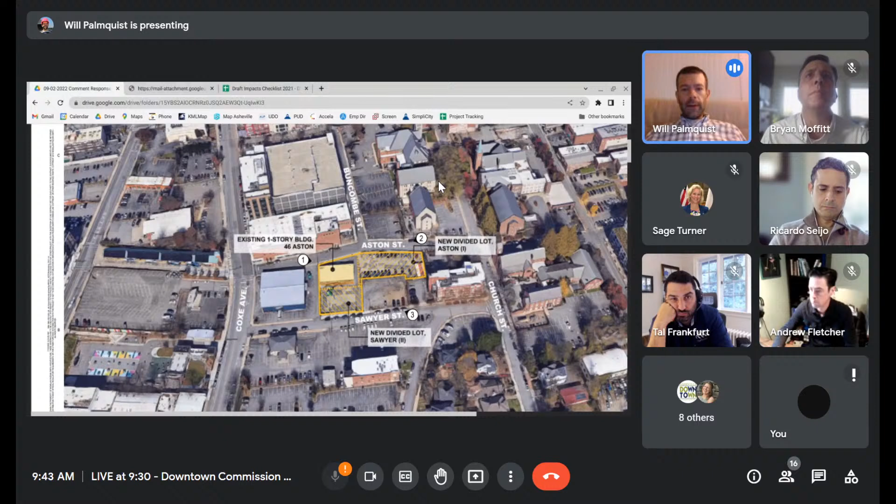The site, outlined here in hatching, is an interesting shape that sits higher on Aston Street with retaining walls on the south side. It's currently 2 parking lots plus an existing 1-story building proposed to be renovated. Surrounding uses include Aston condominiums to the east, a county building to the north, and a church on Aston Street.

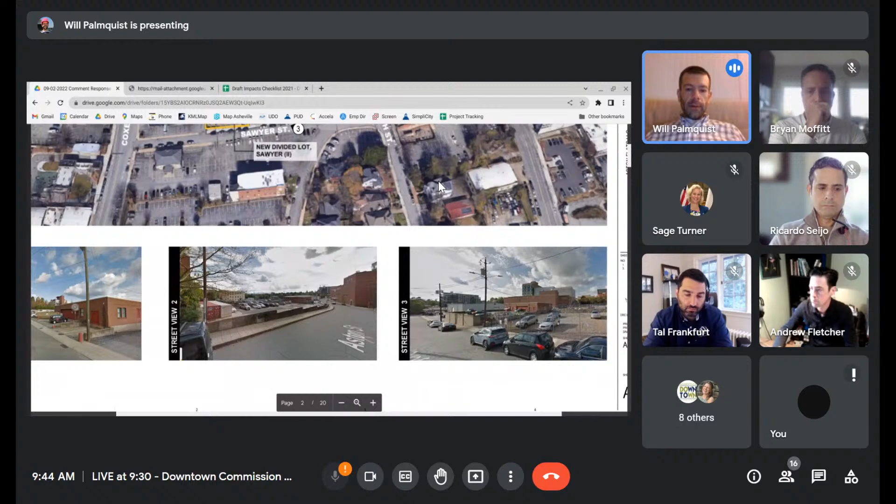Here are some views giving a sense of the urban design going on there, which is a bit of a transition at the edge of downtown. Hopefully this project can help fold this area a little more back into the downtown fabric.

Let's go to the site plan. What's being proposed is 2 new 7-story buildings, outlined here in orange, to the northeast and southwest of the site. The buildings are pretty much the same height. Building A, the Aston Street building, is bigger overall with 159 microhousing units of the 231 being proposed, and Building B on Sawyer Street has 72 units.

You can see the existing building here that'll be renovated and used for some kind of commercial space, with a plaza seating area located to the north on Aston Street.

Just to back up a little, what's being proposed between these buildings is 231 micro housing units, similar to the Hilliard micro flats project, with efficiency units that have a living area and bathroom but not a kitchen. Each floor has a communal kitchen and living lounge space for congregating, which helps keep rents lower. There's not necessarily guaranteed affordability at certain income ranges, but it's a market-driven approach to providing more attainable housing at better price points than typical studio or one-bedroom apartments with kitchens and bathrooms.

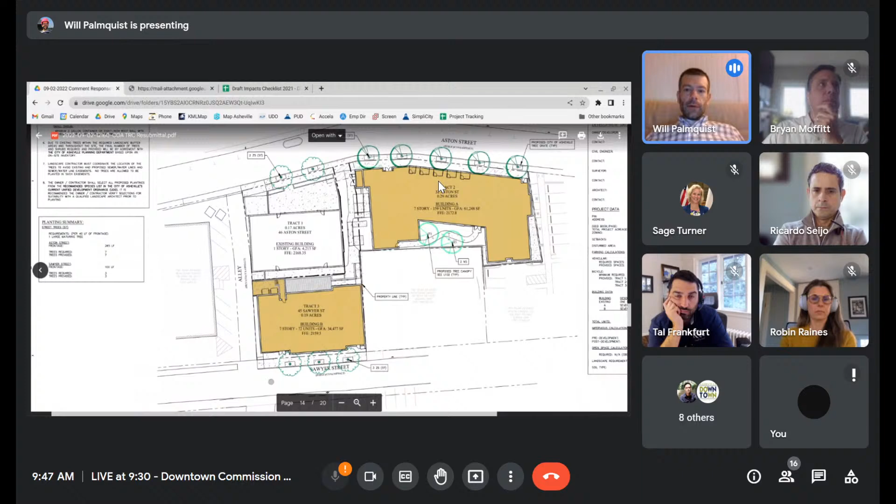Going down to the elevations - here's the landscaping plan. It's pretty minimal in the CBD as far as required landscaping, mostly consisting of street trees along Aston Street with the rebuilt sidewalk and tree grates, and along Sawyer Street as well. For tree canopy preservation, they have a couple trees in the courtyard area behind Building A, covering about half the requirement, with fee in lieu proposed for the other half.

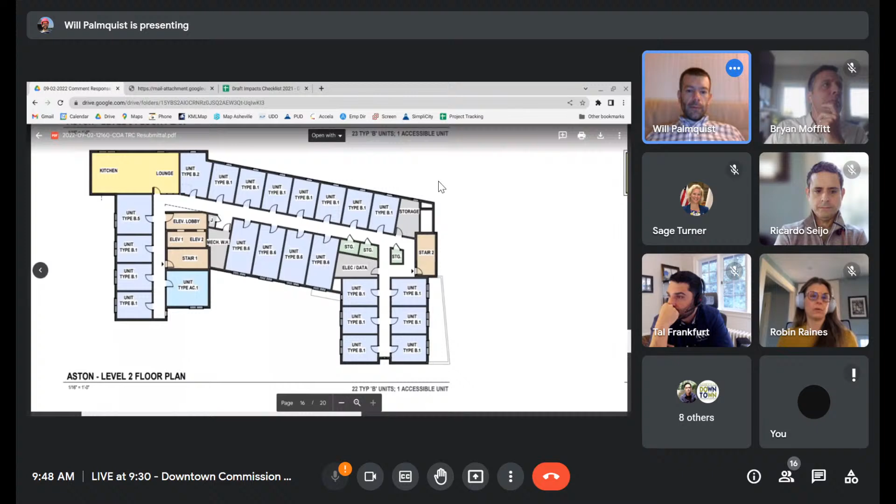Here are the floor plans. I'll zoom in on one of them - they're fairly typical for each floor. You get a sense of how the units are arranged, along with the kitchen and lounge space on each floor, as well as storage space for residents. That's pretty typical for each floor and relatively consistent between the buildings.

This is the Aston Street facing building, which is a little more linear. Here's the facade facing Aston Street.

I should note an interesting aspect of the project: the CBD zoning district does not require any off-street parking, and none is being proposed. Although not required, they are proposing bicycle parking and other amenities to bolster that as a transportation option. We don't get many projects downtown without parking, so that's an interesting and frankly exciting aspect of the project.

There's a materials board, so I'm not going to talk about materials right now, but first get a sense of the layout of the building, how it works in the hillside, the different bays and massing - a lower podium, for lack of a better word, with a different arrangement and staggered windows above.

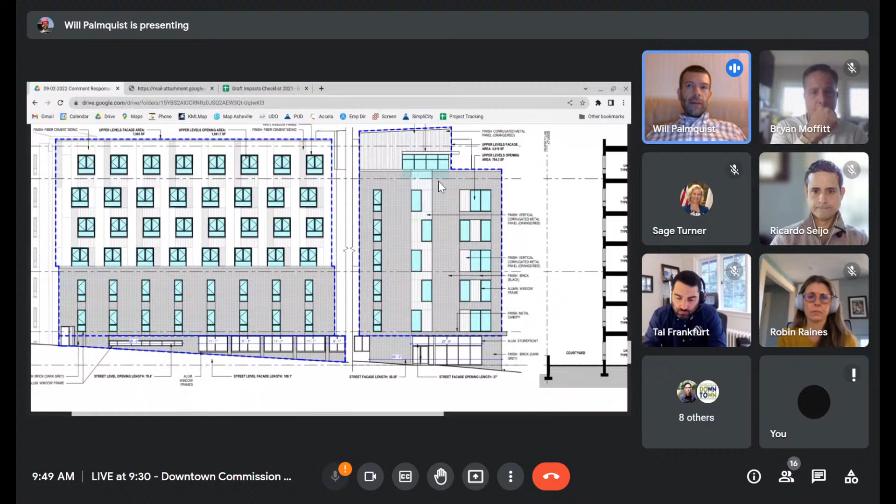And then as you turn the corner, what's on the right here is the west elevation, if I'm not mistaken, shown here.

Right, so that's the west elevation, south elevation here, demonstrating that they do meet the opening requirements for windows and other openings for the CBD form code requirements.

The building's not on a primary pedestrian street, so it doesn't have the enhanced requirements that some projects have. It is split between the tallest height zone and intermediate height zones of the CBD, but it meets the requirements of both of those, so it is obviously in compliance with CBD zoning to stay as level 2, not have to get a conditional zoning or a variance of some kind.

So this is the floor plan for the Sawyer Street facing building. You can see it's a much more compact building, with stairs and elevator in the center of the floor plan, and the units, kitchen, and lounge arranged around that central element.

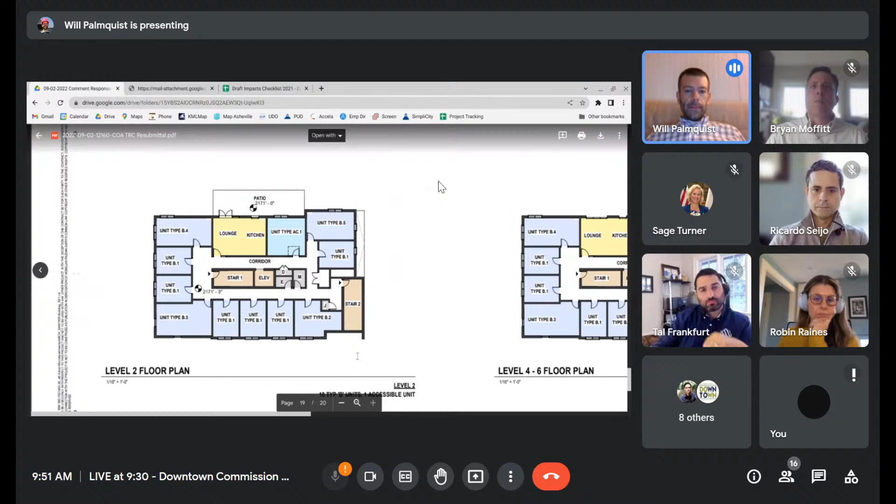And then the primary Sawyer Street facade, entrance, and storefront shown here. You'll see it better in a couple of renderings - the buildings are obviously designed in tandem, so they borrow a lot of the same design features, and elements are shared across the two buildings.

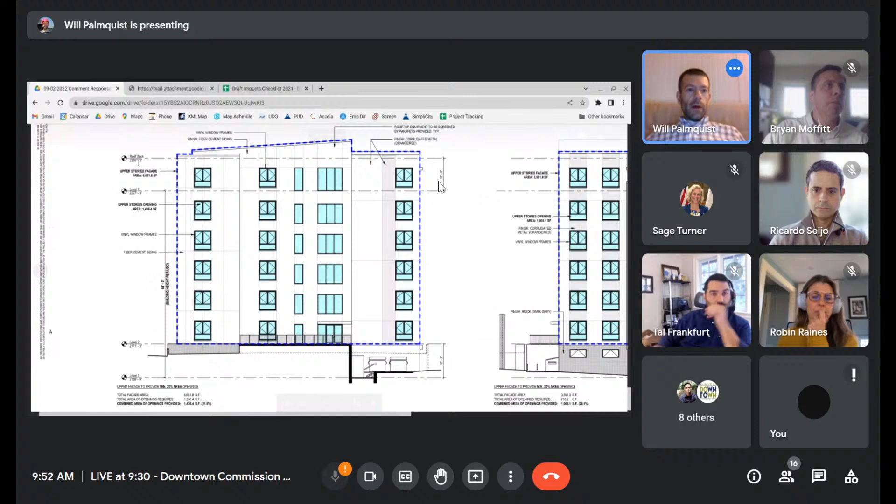Okay, on the right is the east elevation for the Sawyer Street building, the west elevation, and then on the left is the north elevation, which would face more the interior of the site and that one-story warehouse building or garage building that will be more of a commercial use going forward.

So I'll show the renderings that were shared by the architect and some of the material boards. This is the Aston Street building again, to get a better sense of some of the relief and dimensions being proposed.

So there's more of an elevation drawing on the left, and then more of a conceptual rendering, so you can see how those upper stories are set back, which is one of the requirements in the CBD to help lessen the impact of taller buildings. You can see how that organizing feature works.

I think I said earlier that it was a secondary elevation, but it is the primary elevation.

I heard a hand go up. No, I just put our draft impacts checklist in the chat, just to remind everybody what we're doing. Sorry, Will. No, thanks, Bryan.

Yeah, so that's the main facade of the Aston Street northern building. Here it is looking west from Church Street, down Aston Street. A view from Coxe Avenue of the two buildings.

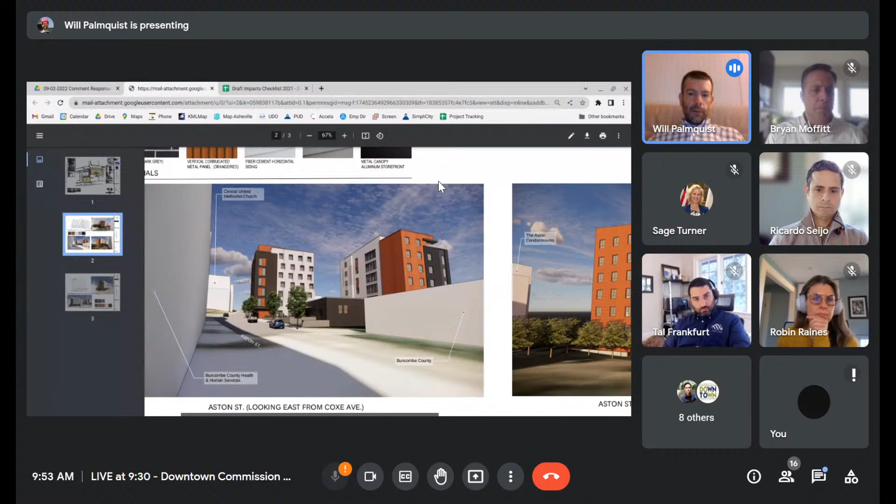So the Aston Street building on the left, and then the Sawyer Street building on the right, and you can see that one-story garage space, commercial space, with a renovated plaza or courtyard in front of it.

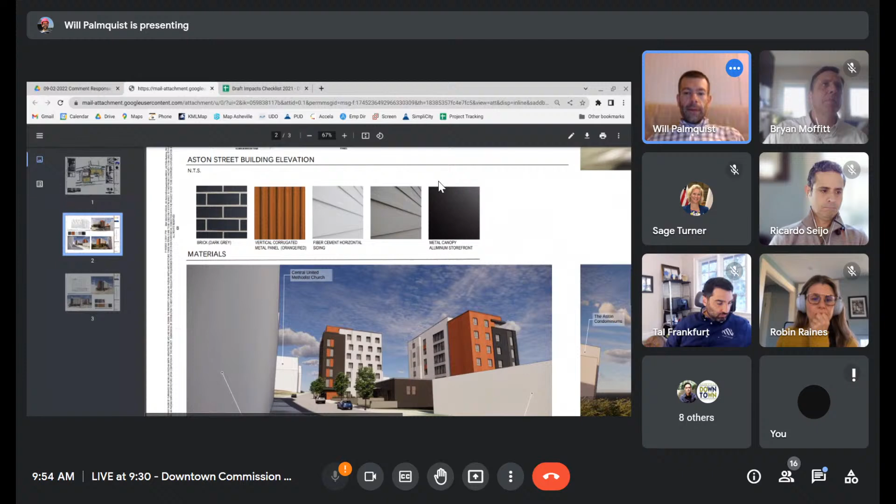Here's a materials board that corresponds to the colors on the renderings - a combination of fiber cement siding in a couple different colors, vertical corrugated metal panel in an orange-red color, and then some of the darker colors are either the dark gray brick or the metal aluminum storefront features.

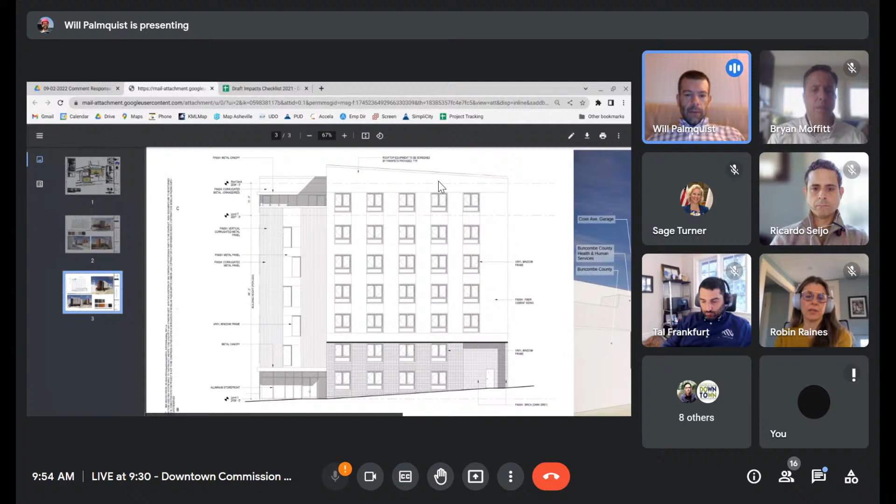And then finally the Sawyer Street building in elevation view with the storefront on the left, and then the conceptual rendering of that elevation. You can see how the corner element in the storefront ties in those two different sides of the building as well.

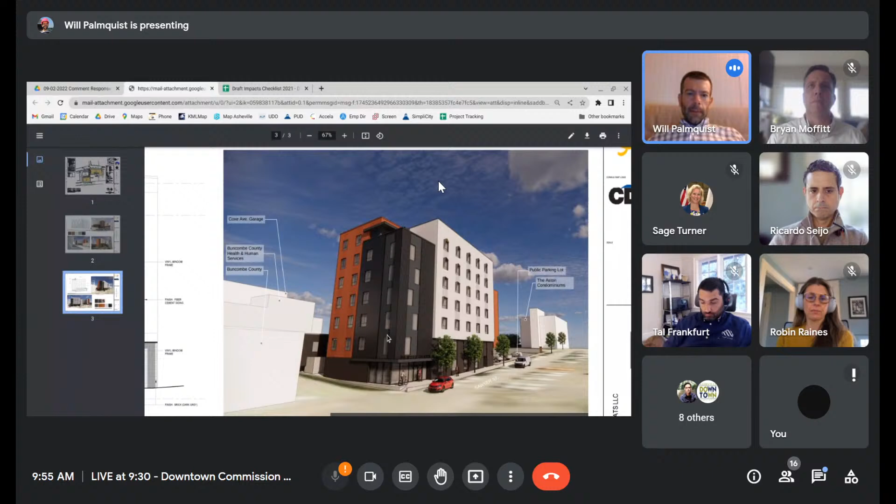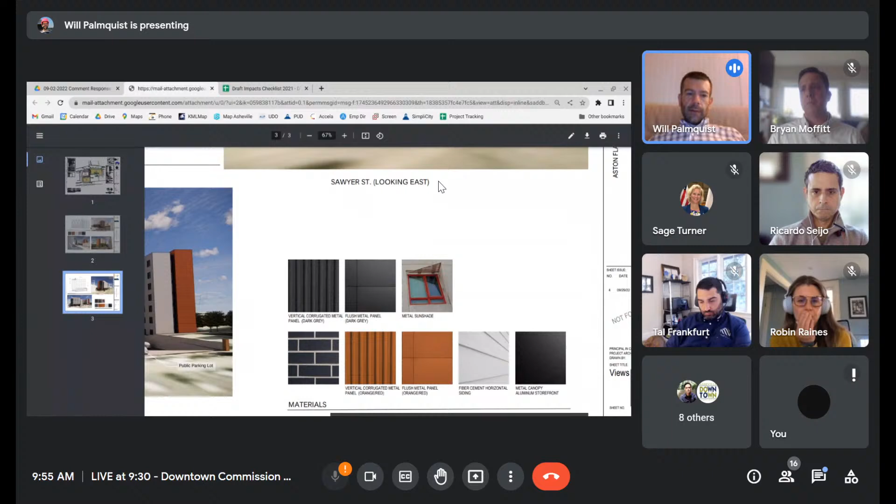You get a sense for how the projects are designed in tandem - similar materials being proposed, though this one has some different coloring for the corrugated metal and metal panels. It also has metal sunshades proposed above the windows to give shade to occupants, and some horizontal relief and interplay with the elevation.

And then the building view from Sawyer Street, which gives a good sense of how the proposed two buildings, the one on Sawyer Street and the one on Aston Street, fit into the existing context and the public parking lot, which will remain in that center area, as that's not part of the project or owned by the applicant or anything.

So I think I've hit on all the highlights. We have the applicant here with us today. We have the draft impacts checklist to help guide our conversations.

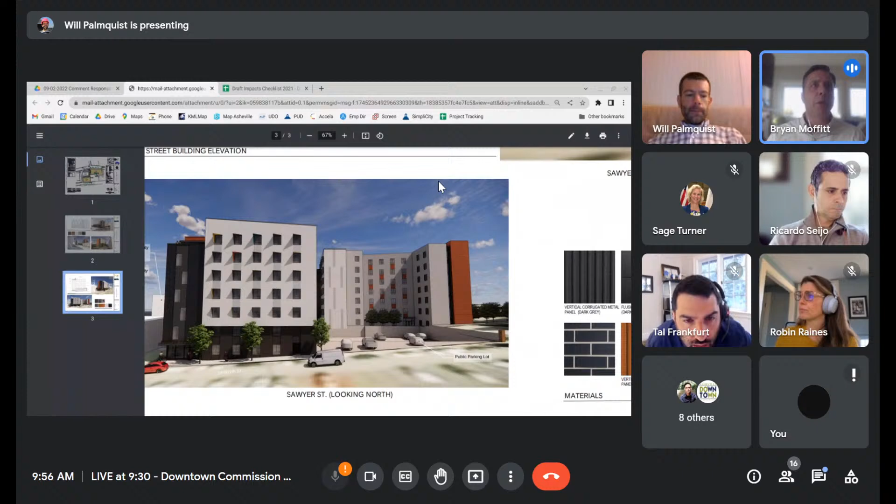Go ahead, Bryan. Real quick, Will, can you address the pedestrian connectivity between the two buildings, the little duct between that they did, before the applicant gets on?

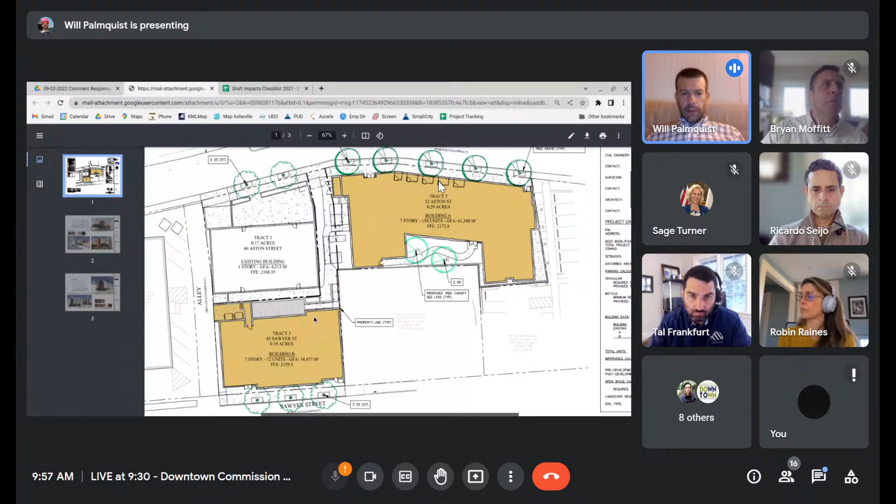Yes, I know we talked about this a little bit during informal DRC. So essentially this walkway would be proposed between the Aston Street building and the garage building, and then cut south, and that would provide access around the building. I think there might be access to the building directly from this elevation, if not around the building to the primary entrance.

You have this courtyard feature for building A, but it really just connects to itself. And the retaining walls don't really allow it, once someone's out here they can't really hop the wall safely or anything, so they just kind of get redirected back into the building. I think it's one challenging part of the site, is the way the elevations and retaining walls work. It's not a traditional, or as usual, flat block in downtown where the connectivity is very logical, but that is kind of how it would work between the two buildings.

And then obviously with new sidewalk on Sawyer and Aston Streets. I don't believe there's one proposed along the alley. You do have some loading access, so I would believe there's access on this side of the Sawyer Street building, so folks don't have to walk through the alley to get into that building if they had friends in the other building or whoever they were visiting. But we can let the applicant maybe refine that. That is a good question.

Okay, well, thank you. Are there any questions for Will before we start discussing this with the applicant? Go ahead, Andrew. Yeah, so I think this is a great example of what we can do without parking minimums for residential uses.

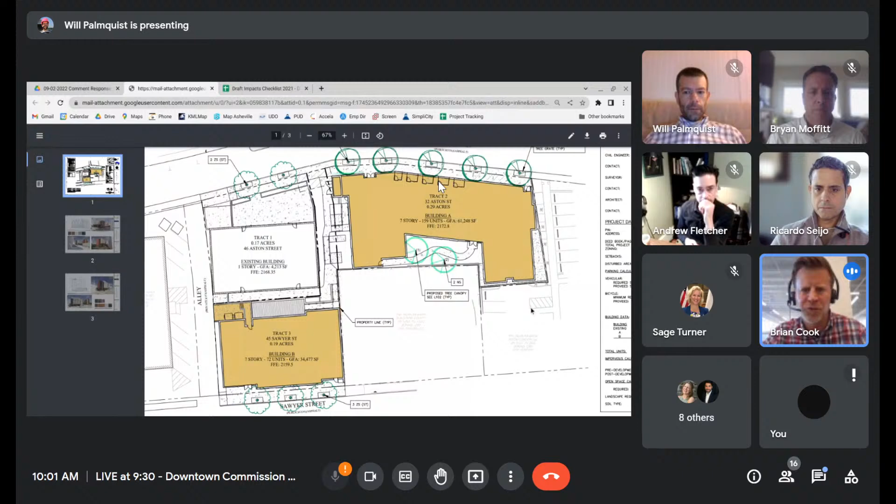Yeah, I think first of all, Will, fantastic job presenting, you hit all the key details. I just wanted to follow up on one of the recent questions about the connection between the two buildings. So that area between the two buildings is primarily intended for utility access. Unfortunately, we always got to have some location for transformers and generators and such. So it's primarily for utility, but we also did not want to just have a driveway, so we're going to try to pave and landscape that so there is some connection between the two buildings.

The buildings do not share any amenities, they each have their own amenities solely within each building. But with the walkway, there is the opportunity for connection between the buildings, or even just if you're riding your bike and you're on Aston Street, you can cut through and come in the back and have direct access to where the bike room storage is. So that's primarily the reason for that connection.

There is not a direct connection from Aston to the left to the alley. It drops down a couple feet from that location, so there would not be a connection between the two streets or to the alley without going through the building. But other than that, like I said, I think we hit all the key points on the building, and I'm happy to answer any questions you guys have.

Hey, I was reading through a thread on Facebook about this project, and one question that folks had was, is there some type of mechanism in place that prevents subleasing that would then prevent any short-term rental use? So if you could answer that.

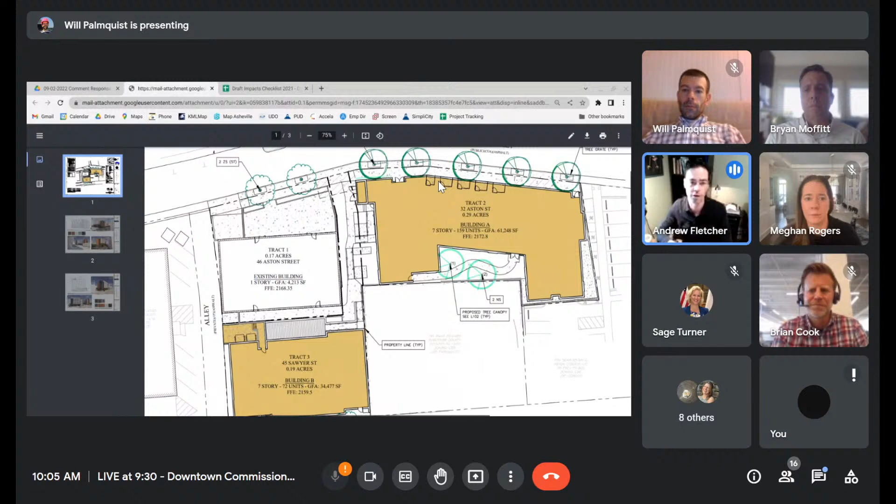Sage, that's a great point. But going from a flat surface to a 7-story building, this may actually help the folks at Aston by breaking up and baffling some of that sound, is what I'm hoping for. Also, I'm imagining the windows in new construction are just going to be superior to the windows in the Aston, since it's an older building. I know that living with old windows during the transition to new modern windows made an absolutely huge difference, so I'm hoping this is a net positive for sound all around.

Thank you, Andrew. Go ahead, Robin.

Do we know, I know we have the microhousing project that's going to be built in the hotspot, but other than this, are there any existing microhousing units in Asheville yet? Or are these the first two projects? I thought there was one in West Asheville that Harry Pilos did, around this size. Yeah, these are the only ones I'm aware of.

I thought Harry Pilos' project was pretty similar - a West Asheville project up behind the Kmart Plaza. Okay, I just didn't know. It's definitely a newer model, and I don't know of any downtown.

Some would say like some of the hotel conversions to housing. I like to remind people that we've actually never had a housing complex become a hotel, but we've had lots of hotels become housing. So some of those older housing buildings, the Vanderbilt, Battery Park, are kind of set up with similar floor plans, but they're connected to adjacent units - they're micro in itself, but not intentionally built like that.

This could definitely go to a hotel if it's not successful as microhousing, because the units don't have kitchens and things like that. I would have just wondered, if we had any in Asheville, how successful they were. Robin, to your point, on my council email I've received a couple emails asking, is that really what's happening here? Perhaps it would behoove the public to know from staff what it would look like for an apartment complex to approach becoming a hotel.

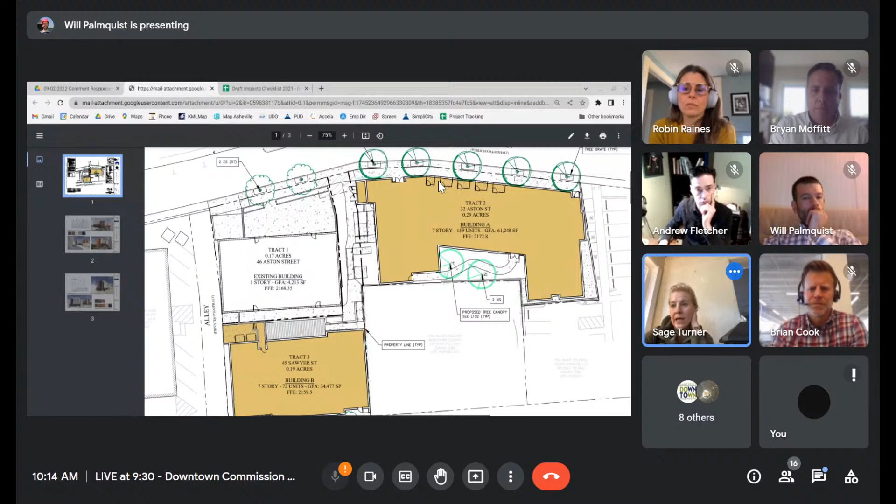I had one other point, but I believe I have forgotten it, so I will let it go. That's it.

Andrew: just to go back about parking, if the residents of these buildings were formerly commuters into downtown and they now move back into downtown and get to walk to work instead of driving in, looking for parking, paying for parking, this type of project hopefully alleviates some of the greater regional traffic concerns. When you get people that can walk to work rather than drive and park, that's really good for everyone experiencing this town and complaining about parking. Traffic isn't just number of cars on the road, it's also average trip distance. If we can cut those average trip distances down, get people close to living and working together with projects like this, I'm in support of that. And no kitchens in the units is also good for restaurants.

So. Go ahead, Kimberly.

Hey Sage, I just want to acknowledge what you just said. I remember that report and update, and I think what you stated, and the timeliness of it, is very critical when we think about long-term planning. Sometimes citizens, all of us, get in a kerfuffle about a specific unit, a specific item, a moratorium, this or that. In the long stretch of 5, 10, 20 years, these incremental changes, whether moratoriums or an increase in housing versus hotels, it all plays a role. I want to acknowledge you naming that right now, because that was 4 years ago I think, and it's powerful, and it's why these committees matter, why working collectively matters, why thinking about the big picture while working on individual projects really matters. So I just want to thank you for saying that.

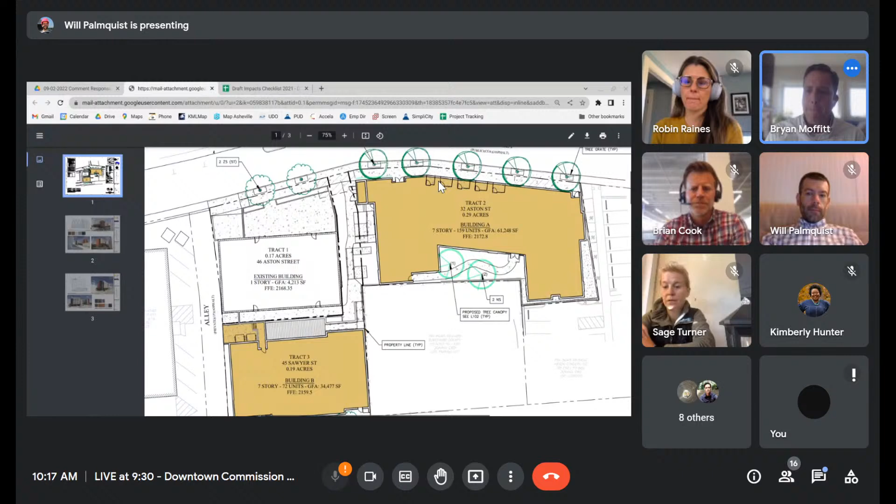I'll reserve my comments for design review, but as far as the impacts and stuff, I think it's a home run. And this is coming back to DRC, is that right, Will? Yeah, Thursday's DRC meeting. Okay, I should have already known that. Sorry, I haven't sent out the materials yet, so no worries. Okay, all right.

Well, if there's no further questions, we don't really vote on these items, right, Will? I don't think so. I get turned around. Yeah, that's correct. Your comments get forwarded along.

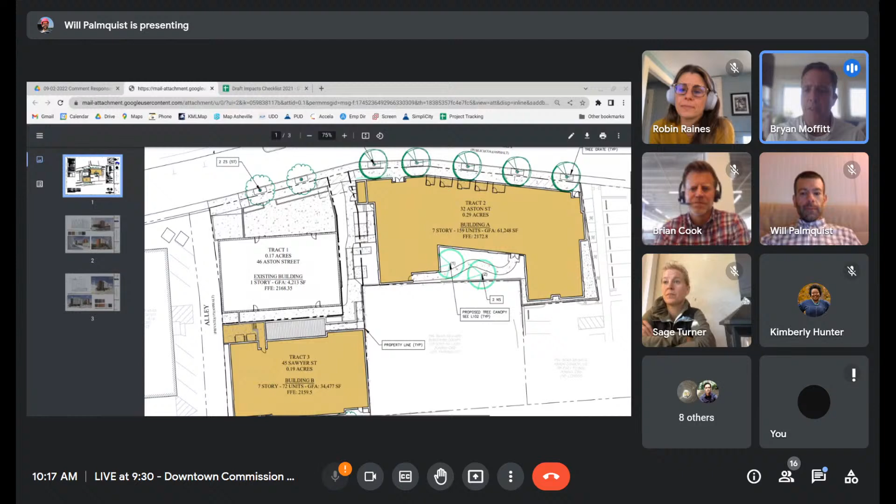Okay, very good. So continue the path, and I look forward to seeing this project at DRC, and I really look forward to seeing the project get built, and I hope it's a big success. All right, thank you all.

All right, we'll move into our next item of business, which is the establishment of the Pack Square Plaza Visioning Subcommittee. Steph Dahl is going to address that, and I'm just going to turn it over to her, and then we can have a discussion.

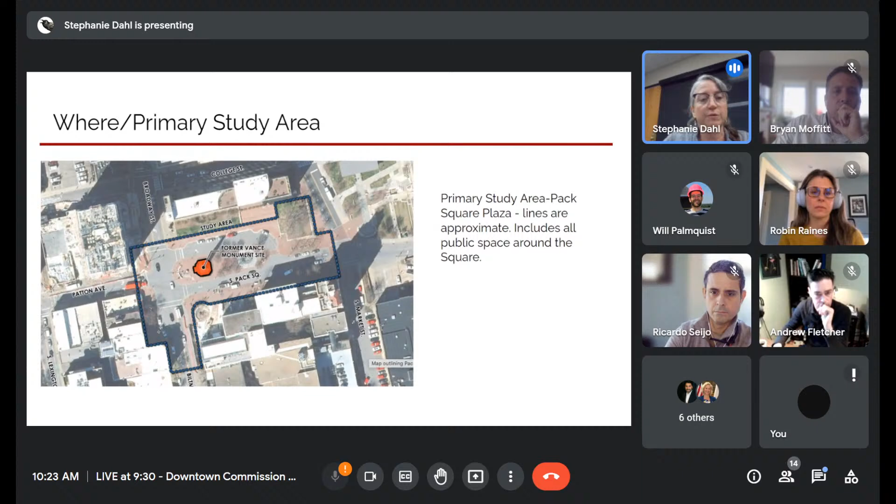And we've already been doing a lot of engagement. You guys are very familiar with Pack Square, so I probably don't need to tell you where that is. But what I will say is that even this map is incorrect as far as what our study area is, and it highlights how many people, including this map maker, do not realize how much of the space in front of the Biltmore building is actually public space and part of the city park.

And when we're talking about the Block, this is the area that we're talking about. And you can see that there's corridors that reach out on the north end of the Block to the west and also to the north.

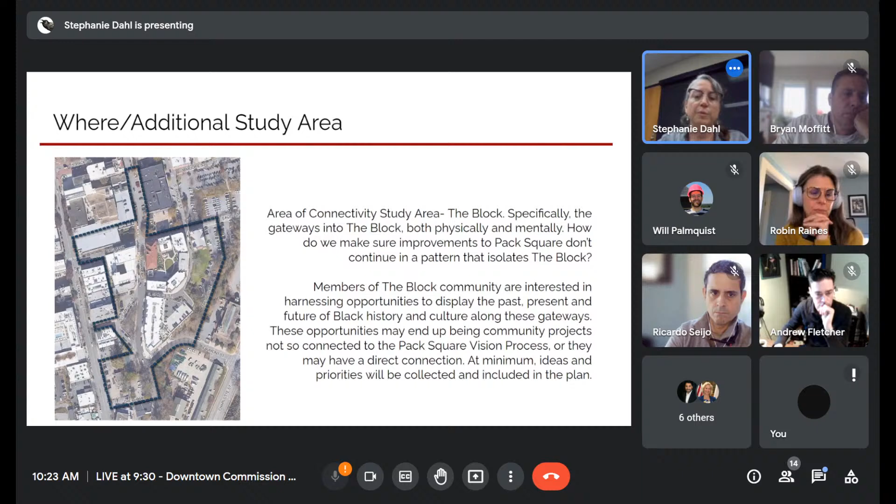And those corridors, many people walk right by and are unaware that they are within a 1-minute walk to one of North Carolina's most preeminent cultural institutions, the YMI, plus a host of other businesses and attractions, including the mural at Triangle Park, for example.

So the project status, we do have a survey up, and we're encouraging you and people that you know to take it. We've had over 300 responses so far. It's at publicinput.com/Pack Square. It has a few questions that are going to help us with this first phase understand the basics of what people are thinking, why they actually come here, how often they come here, things like that.

We released a temporary public art program that was guided heavily by the Public Art and Cultural Commission and have already seen 4 installations, with another one on Saturday. There's a big article about it in the Mountain Express if you want to check that out and know more. But the point of this public art program is to help people think differently about how we use public space to reflect our community.

For engagement, we've already started doing several focus groups and having conversations. We're calling them 5-minute pitches. We're happy to reach out to any of your associations or organizations to do the same thing, telling people what the project is about, hearing from others and the expectations, and asking some initial questions as we lead into December 1st, 2nd, and 3rd, which are going to be 8 special sessions where we bring people in to address those 5 issues that I spoke about earlier.